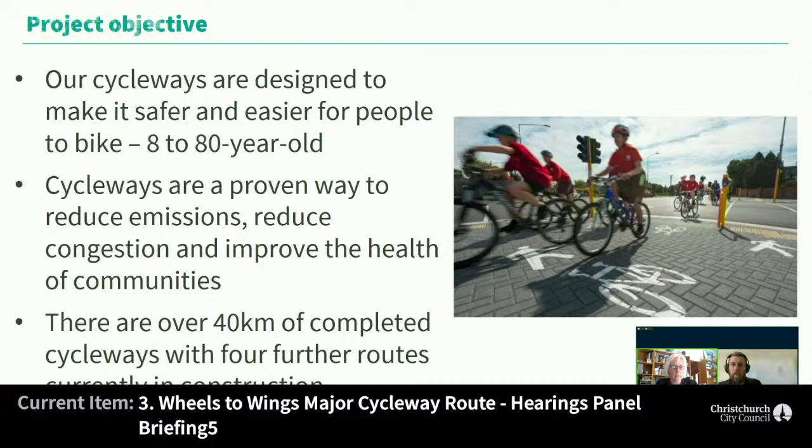Here we go. So these are our objectives. We're looking to deliver against the objectives of the Christchurch Strategic Transport Plan, which is really about us trying to provide a realistic mode choice for people. But we want to be specific to the needs of the people of Christchurch.

We want to be safe and realistic and achievable. It's really about attracting those people that would like to cycle, but whatever that barrier is, 9 times out of 10, that is about it doesn't feel safe enough. So it's about providing a facility that feels safer to those people that want to try 1 or 2 of their trips each week by cycle, and really try and make a difference in mode shift. That's what we're trying to achieve here, and giving people options.

So my last slide before I hand over to the team is the next one. So that's the network that we've got here in Christchurch. And this is actually a little bit unique here in New Zealand, in that we are the only city that is putting together a cohesive and interconnected network. Now you can see from this, the dark pieces are built. The medium strength pieces are underway. And the lighter ones are the ones that are planned for the future.

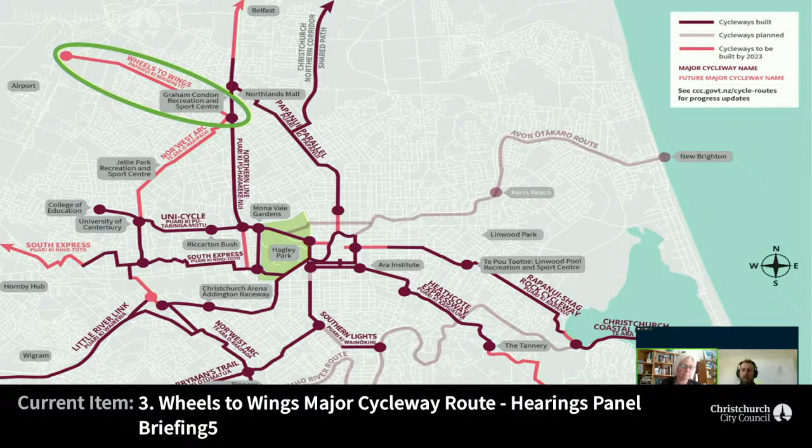Great. Thank you. Okay, so the objective of today is to brief the hearings panel on the Wheels to Wings cycleway, and we're going to divide the project up into 3 main sections because it's a relatively long route at 4.6k. So we're going to look at the west end from Johns Road to Nunweek Boulevard, and then the east end from Greers Road to the Northern Line, and then finally the central section, which is Nunweek Boulevard through to Greers Road.

I'll present the project background and design considerations for a cycleway, and specifically for the Wheels to Wings route, and then Anne will go and provide an overview of the community and stakeholder feedback.

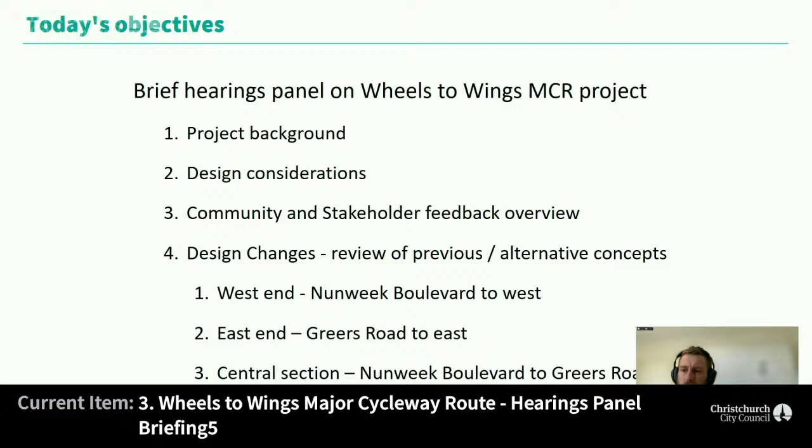So back in 2017, we undertook a route selection where we looked at a wider network and identified where a cycleway could go, linking the Johns Road underpass through to the Harewood Road at the railway line. And that was presented and discussed with the community boards through those areas, the Papanui Innes and Fendalton Waimairi Harewood community boards. In 2018, the Harewood Road was endorsed as the preferred route for a major cycleway to be on, and that was endorsed by the Infrastructure, Transport and Environment Committee.

In 2019, the Gardners-Breens Harewood intersection upgrade was approved by council, and that is for traffic signals to be installed at that intersection. And as part of that, funding was brought forward, and for that to be included with the construction of the wheels to wings.

In 2020, we started the scheme design reporting. So that involved joint community board briefings in November. The Urban Development and Transport Committee confirmed the route along Matson's Ave as the preferred route for Nor'West Arc. During the same time, the Greer's Harewood intersection was identified for minor safety improvements, and the Northern Line Harewood Road crossing was confirmed for traffic signals, with construction of those expected in 2023.

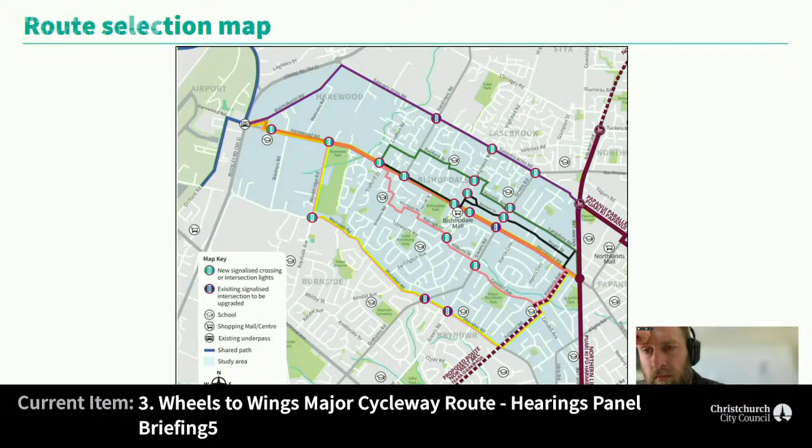You can see the width of the corridor, shown in light blue, is quite extensive. It extends to Sawyers Arms Road in the north, through to Wairakei Road in the south. All the different coloured lines are the different routes that were assessed against certain criteria - criteria for cycleway users, criteria on impacts to the community, and criteria on costs and program.

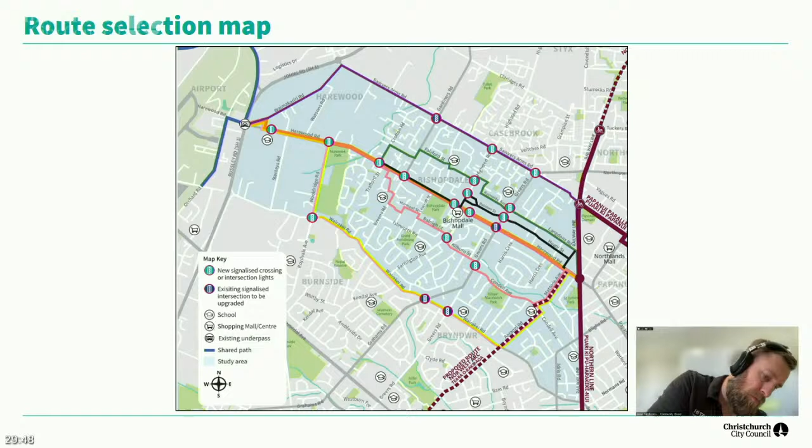The outcome of this was the identification of Harewood Road as the preferred route, which was endorsed by the ITE in 2018.

As part of that evaluation of the route, we identified what's a straw man of a facility type. The facility type wasn't locked in, it was just an understanding of what kind of facility would be suitable for the volume of the road and the areas we're trying to connect into.

Back in 2017, the facility types that we thought would be appropriate at that time are shown there: a shared path on the south side down by Harewood School, two-way past Nunweek Park, one-ways through the central section, and then either one-ways or a two-way on the north side from Greer's Road through to the Northern Line Railway.

So what do we consider when evaluating a major cycle route and the kind of facility that might be included on a road.

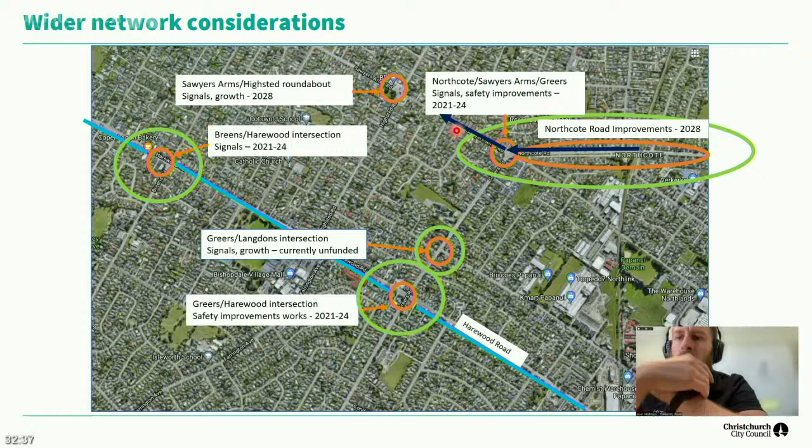The first one highlighted here is the Northcote Sawyers Arms traffic signals and the Northcote Road improvements, which is a capacity improvement to get more traffic through. This project promotes the east-west link along Sawyers Arms Road from QEII Drive. That's the route coming from QEII Drive along Northcote Road. Improvements at this Northcote Sawyers intersection improve capacity and attract more traffic to Sawyers Arms Road. Currently it's quite a difficult turn to undertake, the right turn from Northcote Road to Sawyers Arms Road. So that improvement attracts a lot of traffic away from Harewood Road and onto Sawyers Arms Road.

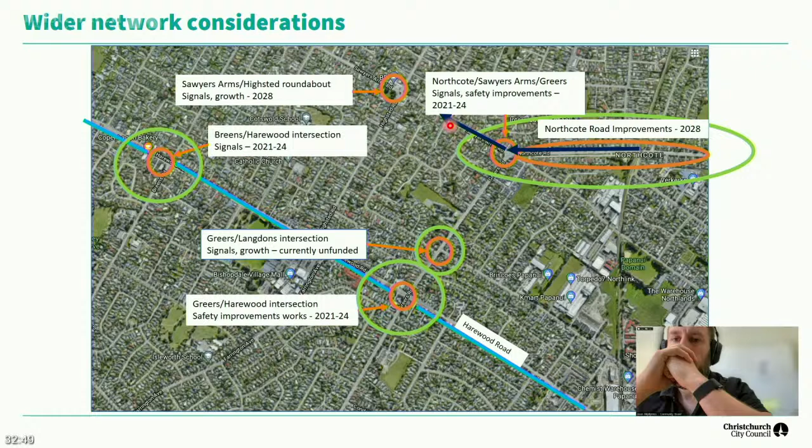Other improvements include the Greer's Road intersection, where there's currently a crash problem, and there's a safety project that's going to provide right turn arrows off Harewood Road and Greer's Road.

There's the Breens Harewood intersection that has been approved by council for construction, with new traffic signals there. The feedback from the public was that it's quite difficult to exit Breens or Gardners Road.

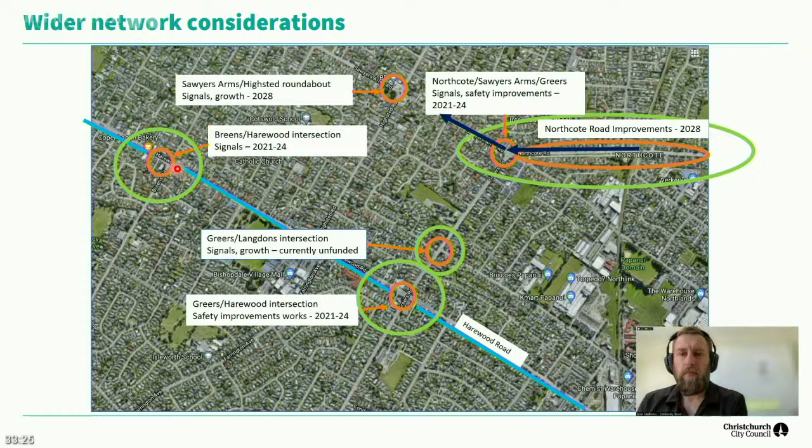The Sawyers Arms Highsted Roundabout has capacity improvements proposed in 2028. And then the Greer's Langdon's intersection - that's had increasing pressure on it. It's currently unfunded, but it is being investigated by staff.

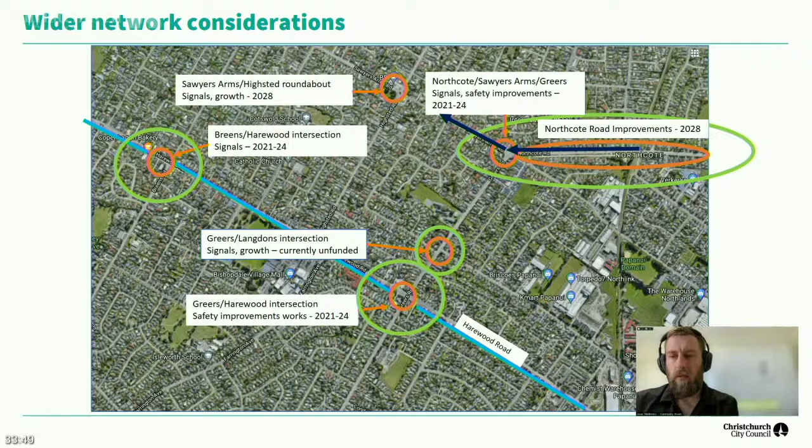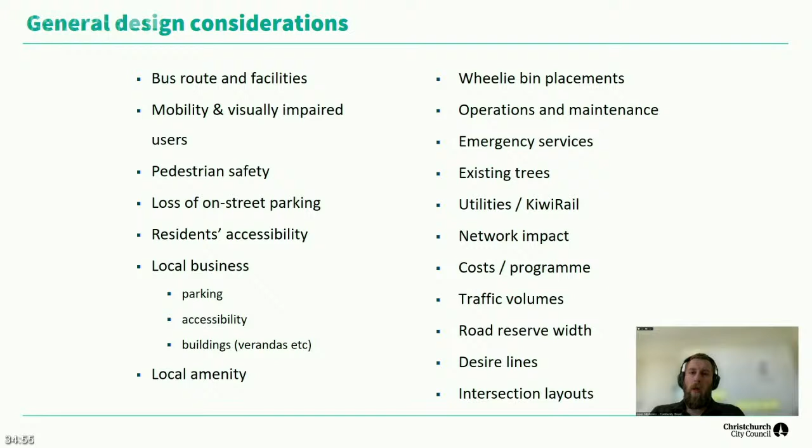Specific considerations for the Wheels to Wings and Harewood Road route include the 4-lane section. What are the effects of removing a traffic lane?

Does this support other improvements in the area, and is it supported by other improvements such as the Northcote Road signalisation?

The link to the Northern Line MCR, which is existing, and the proposed Nor'West Arc on Matsons Ave - how do these interact with each other, and how will they connect?

The Bishopdale Roundabout is a large intersection with a lot of mature trees in the middle of it. What's going to be most efficient for traffic, but also the pedestrians and riders coming through?

Quite unique to Harewood Road is the number of rest homes and retirement villages, particularly up the eastern end with Golden Age and Wesley Care. We have the parks, Nunweek Park, Bishopdale Park, and sporting events that occur there. There's a really high on-street parking demand associated with those, along with the everyday activity of parents coming along with children.

Vehicle speeds along Harewood Road - the surveys are showing that the vehicle speeds are about 5k an hour higher than for a road of this function. If we compare that to the likes of Memorial Ave, the average speed there is 50k, while Harewood Road's up at 55. So there's a speed issue along there, and we've had that feedback from the public.

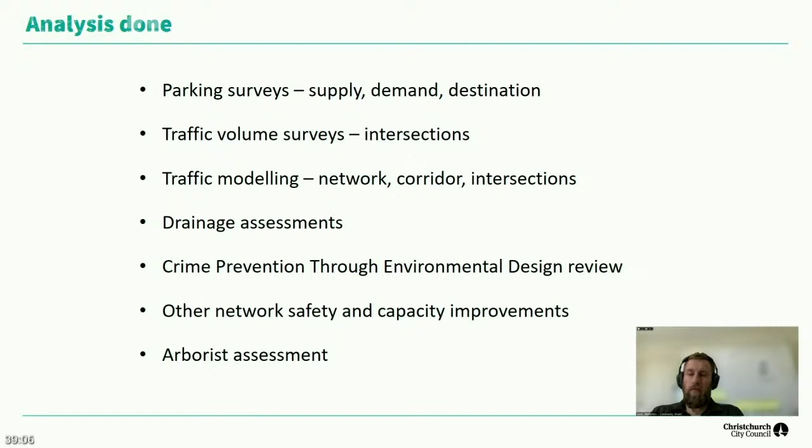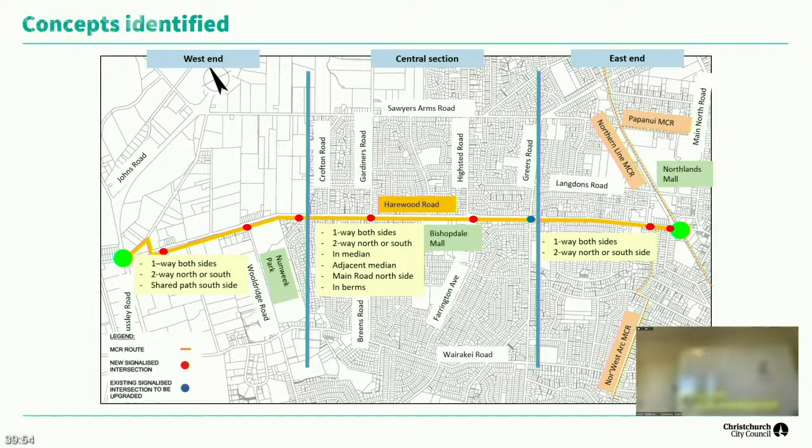These concepts have been evaluated against the design criteria, such as safety for the riders, and that being key for attracting new riders, the interested but concerned group. How direct is the route, how direct is the facility on there, and how comfortable is it to use?

And then we look at the community impact - will parking be removed outside residential properties? Will access to businesses be restricted? And then the costs and the risk associated with delivering that facility.

So review of those options on the previous slide resulted in the recommendation of a preferred concept to go out to consultation, and that is the design that was consulted on, which started in January of this year.

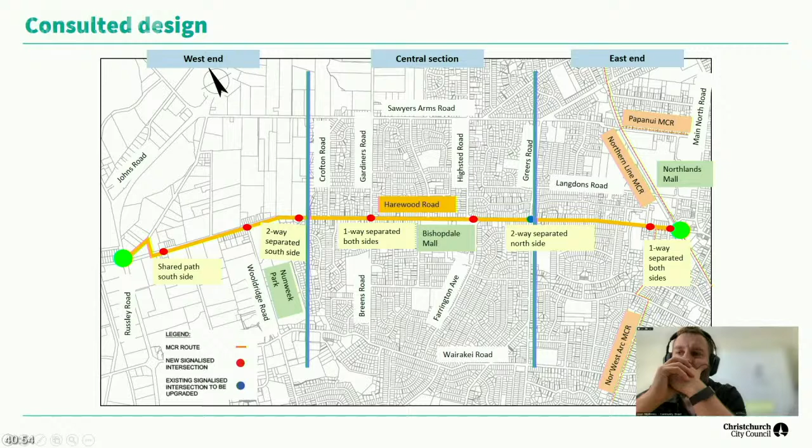It's really a straw man for consultation, and it's based on our technical assessment. We go out to the public and say, we've done a technical assessment, we've visited the site a number of times, at different times of day, and we have an understanding of the route.

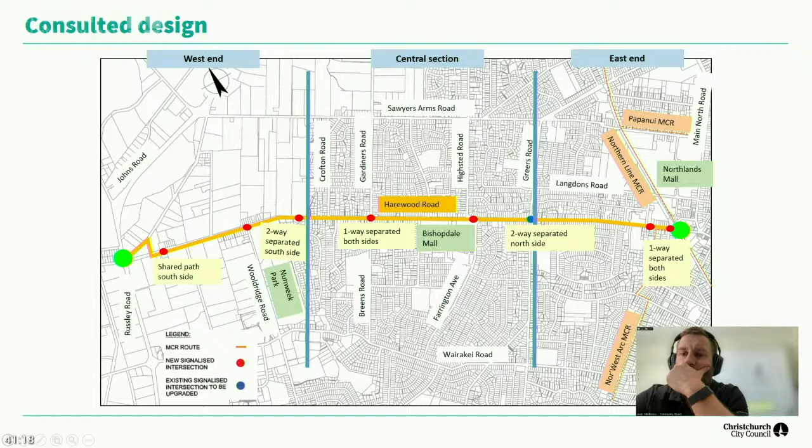But we don't live there. We don't see what happens 24/7. We don't see what happens during special events. So we come out to the public and ask them, tell us how this might impact you. Here's our straw man, here's our best technical assessment - tell us how that impacts you, and we can then evaluate that and make some changes where needed.

So the route that was consulted on, if I quickly run through that: from the west end, you have the underpass of Johns Road. A shared path is provided on the south side of Whitchurch Street, which continues to Waimak Road on the western side, then crosses over to the eastern side of Waimak Road, down to Harewood Road.

It crosses Harewood Road via new pedestrian and cycle signals on a raised platform. This slows down the traffic and creates a safe zone for the kids to cross from Harewood School.

The shared path then continues along the south side of Harewood Road up to Wooldridge Road, where new traffic signals at Harewood Road allow riders to cross and continue via the shared path in front of Nunweek Park up to Kilmuir Lane.

At Kilmuir Lane, the facility changes to a two-way separated facility on the south side of Harewood Road, continuing up to Nunweek Boulevard, where there are mid-block pedestrian and cycle signals, and the facility swaps to a one-way facility on either side of Harewood Road.

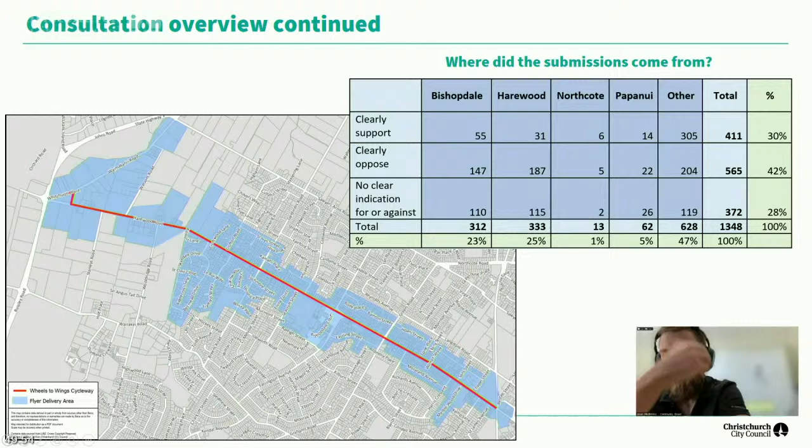So that shows a bit of a breakdown on people's position on the Cycleway, and we've separated them into the 4 major suburbs in that part of the city, as well as those people from outside the area. Submitters with a PO box number, who may not have provided an address, or whose address was outside those 4 suburbs, sit in the other column.

The breakdown of numbers in terms of the spread is similar to other cycleways across the city, possibly with a bit more opposition to the cycleway in this area, but overall it generally aligns with other cycleway projects we've consulted on in the past.

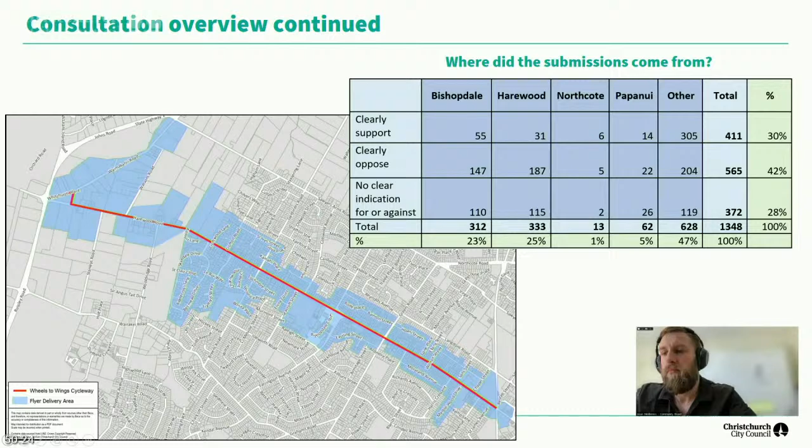In the early stages of consultation, it wasn't myself, it was my colleague prior to me, and one of the team went and met with the students at Hallsville School. They got to meet with all of the students apart from one year group, year 6, who were away on a school camp, but other than that, every other student was involved.

While we're talking on the school topic, I should mention we also received a submission from the Ministry of Education. Looking at the bigger picture, they identified 6 schools in the area who could benefit from the new Cycleway: Harewood School, Cotswold, Breens, Bishopdale, Isleworth and Papanui High. They also said the new signals on the route would increase safety for their students and teachers getting to and from school. They did raise a slight concern that the changes could result in vehicles using other routes which may cause safety concerns for other schools, but they're generally supportive of infrastructure near schools that facilitates active transport and improves safety for their students.

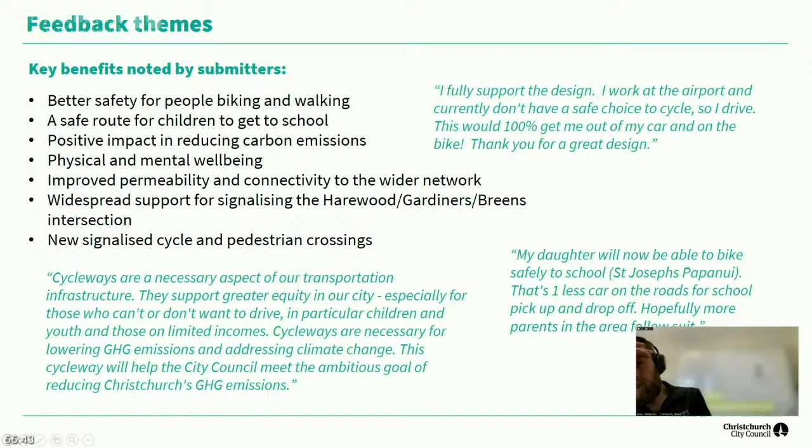It also provides mode choice for travel and the connection to other cycleways around the city. So these were some of the issues that I touched on earlier that were raised by submitters.

As a breakdown from Harewood Road itself, we received 172 submissions from residents and businesses on Harewood Road.

Probably the biggest thing was the loss of parking. In relation to residents, a lot of people were concerned about home services being able to get to their property, the likes of Nurse Maude, Meals on Wheels, lawn mowing contractors. Also concerned that if they had family or friends visiting and couldn't get a park outside their house, they wouldn't come and visit them.

Once we received that feedback, Ollie and I went and met with Age Concern and spoke to them about the concerns raised by these older people living on Harewood Road. Their feedback was that for the services provided, if they can't get a park up the driveway, they're happy to park on the street because it's able-bodied people visiting, and they wouldn't stop visiting people if there wasn't parking outside the house. So that was good to hear.

They've also offered support that they can provide a service where they can pick up and drop off people as well. Feedback from the businesses around loss of parking.

Again, like I mentioned earlier, there is a real range of businesses and organisations on Harewood Road. Some of them have off-street parking and some do rely on the parking on-street. The rest homes and retirement villages, a lot of their visitors are often elderly and need to be able to park on site, or on the street if they can't.

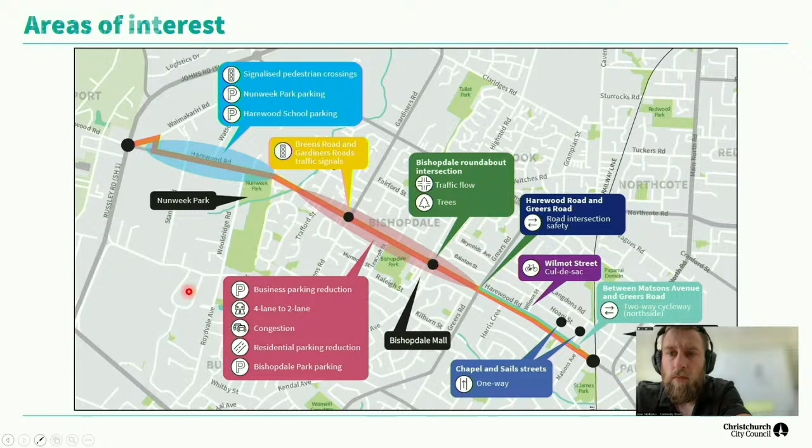Through the central section, parking was a very strong focus, particularly around Copenhagen Bakery and the high demand for on-street parking there, a very popular business. There was also concern about congestion associated with the removal of a traffic lane and new traffic signals, and residential parking reduction, particularly around people having access to properties, visitors, and social isolation.

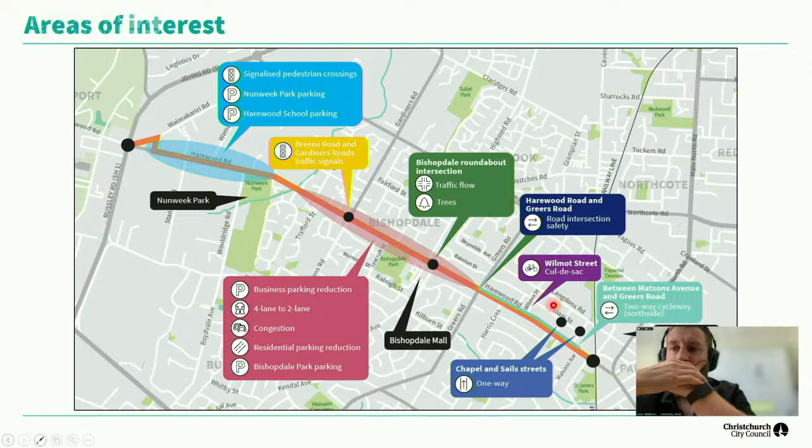Down at the eastern end, there was concern around the two-way section on the north side of the road running past Golden Age, with safety concerns about its operation. Associated with that, the restriction of Chapel Street and Sails Street to entry only or exit only, and the cul-de-sac at Wilmot Street.

So before we go on, let's pause and see if there are any questions around the consultation feedback. This is actually the first time I've chaired a Cycleway hearings panel, so thank you very much for the level of detail you've provided. It's extremely helpful.

I know the area well. I grew up in Papanui and used to go pick raspberries at Harrow's on Sawyers Arms Road, so I've cycled this route, or parts of it, way before it got busy with traffic. But I wanted to ask a preliminary question that's been puzzling me for some time: the underpass to the airport at Johns Road seemed to be decided quite separately from the conversation we're having now.

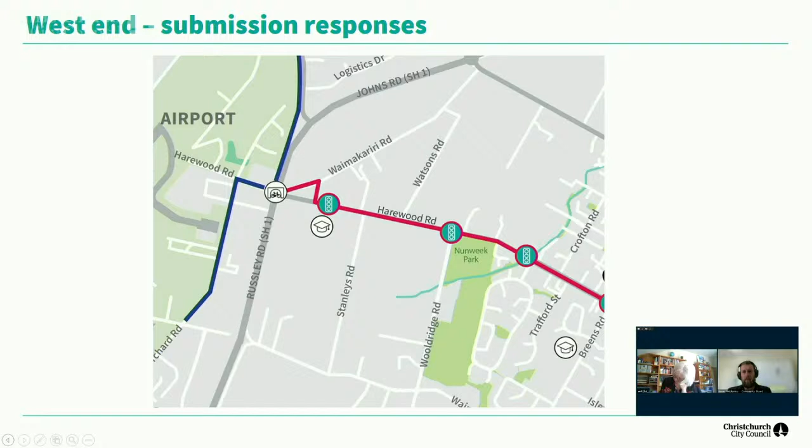Effectively, we'd like to widen that path, but it is narrow, and the grass next to it is a stormwater swale, so it's very difficult to widen the path into that area. How we've been able to respond to the community is to provide some bollards there and improve the connection onto Whitchurch Place, which works very well as a cycle connection outside of the school peak periods. At the start and end of the school day it's very busy with parents and caregivers coming and going, but outside of that it's a really low parking demand.

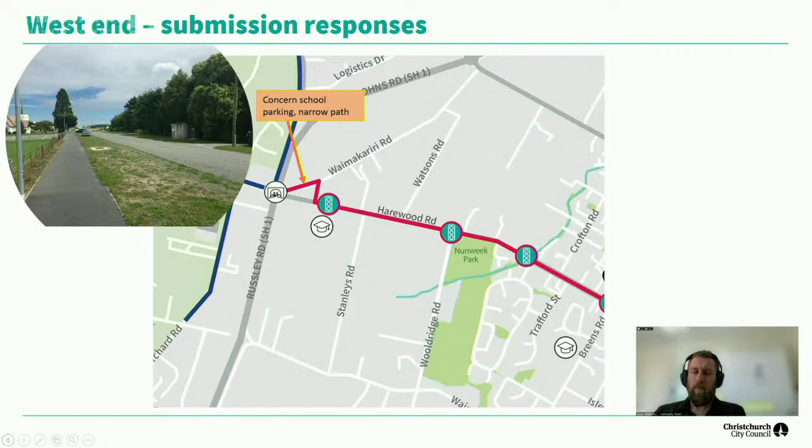At Nunweek Boulevard, there's the proposed signals and platform, and there was concern around that stopping traffic movements and potential noise associated with that.

With the signals at Wooldridge Road, some residents have phoned and said you're going to lose some of the parking there, which is a requirement for the signals, but also the access to their property is going to change now. Particularly during peak periods it'll be more difficult to enter and exit. It isn't any different to any other residential property adjacent to signals, but it will be a change for this location.

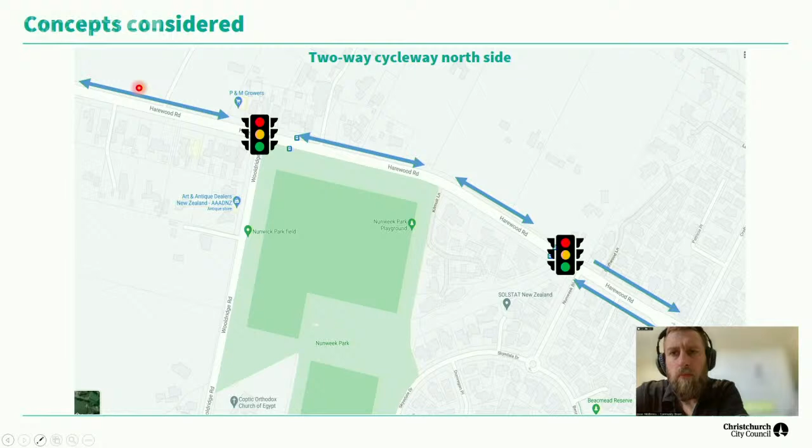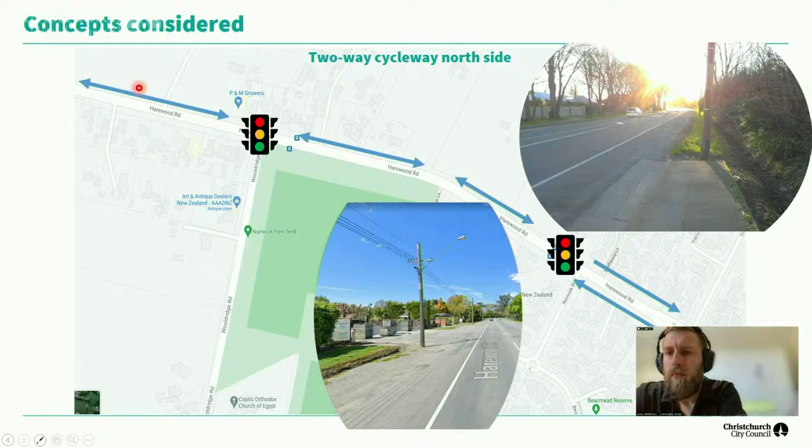And that continues along Harewood Road - this is outside the veggie shop, the photo looking back towards Papanui. You can see the power poles and swales, continuing all the way along Harewood Road up to Harewood School.

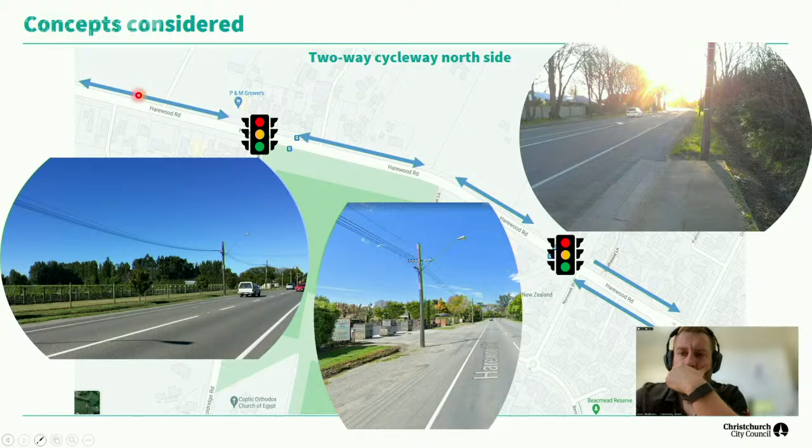Now, if a two-way was provided up to Harewood School, there'd be additional parking loss through that section, which at the moment has been minimised. So primarily due to the additional parking loss of a two-way option on the north side, this option isn't preferred, but it's also an additional cost to construct.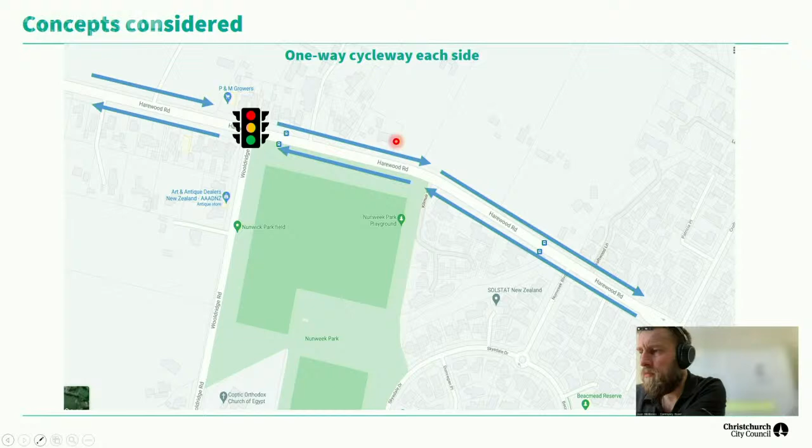Another option considered to mitigate the parking and signals concern was continuation of the one-ways from the central section, coming from Papanui, continuing the one-way on either side of the road all the way up to Harewood School. This also has a number of car parks that would need to be removed on the north side of Harewood Road, similar to the two-way option, with similar conflicts with the swale and power poles.

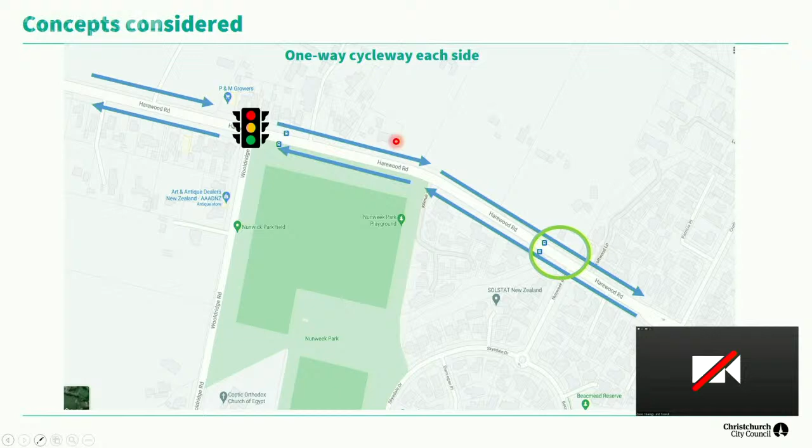If it was to continue up to Harewood School, it would have a similar impact, but it does remove the signals from the Nunweek Boulevard area. But noting that Nunweek Boulevard area has bus stops on either side of the road, so it's reduced connectivity for people using public transport. It retains some parking in the Kilmuir Lane block between Nunweek Boulevard and Kilmuir Lane, and provides some parking outside of the veggie business.

An option to reduce the impact on the Harewood School area would be to cross the two-way over to the proposed one-way shared path on the south side of Harewood Road, through here, so that as the consultant design crosses over at the Wooldridge signals. That does, though, move the delay that was down at the mid-block signals to Wooldridge Road, so it has additional capacity impacts there. This option also wasn't preferred because it has higher parking removal from the park area and additional costs.

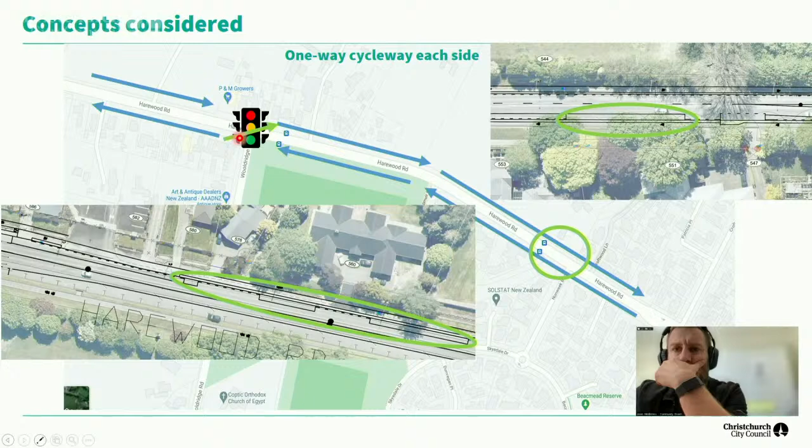So what are the key changes that we've made post-consultation? Up at Whitchurch, we have provided bollards which separate the narrower path from the parking that currently occurs there, which is angle parking during the start and end of the school period.

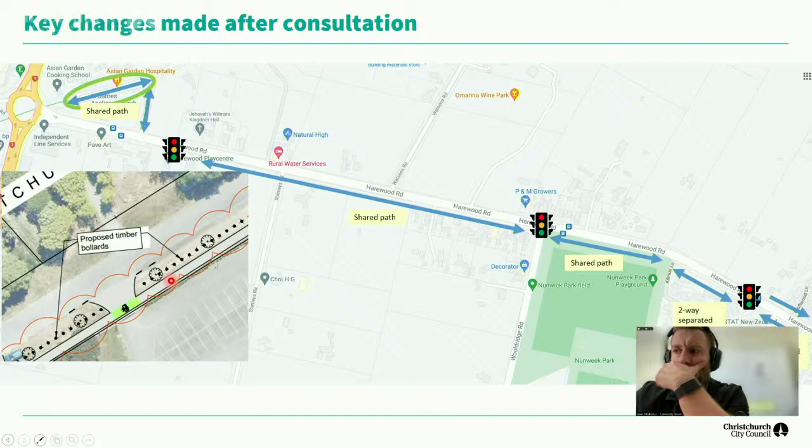This option retains the maximum number of parks, or removes the least number of parks, in this area. At Stanley's Road, we have set back the cycle and pedestrian crossing to allow a vehicle to sit at the Stanley's limit line and riders to pass behind the vehicle. And at Kilmuir Lane, the cycle facility has been moved closer to the property boundary.

And what that allows is people coming from Papanui who are turning left into Kilmuir Lane to position their vehicle out of the flow of traffic. So it's safer for people turning left in, and it allows them to observe users of the path.

Are there any questions around the West End? Almost wish we could have a fly-through and look at the different options in the way. I'll start with you, Jason.

Thank you very much. So just a question on the shared path on the south side past Nunweek Park. Will that lead to any reduction in parking from the amount that's there? And as a supplementary, has there been any investigation into either putting slanted parking or changing the parking orientation there to increase the number of parks you could potentially get, to offset any losses?

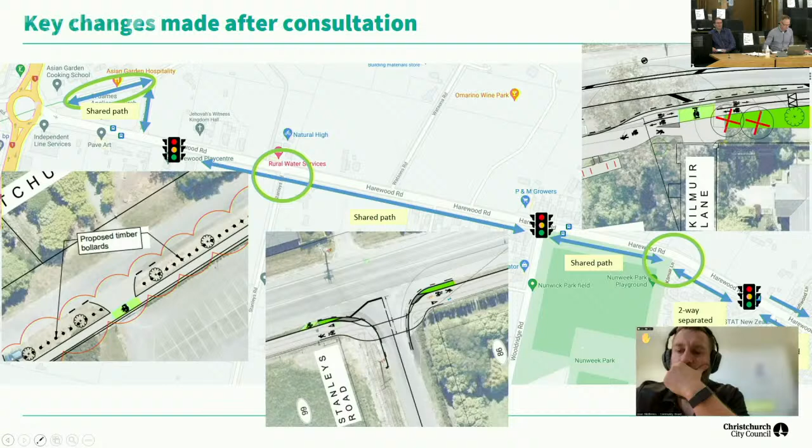Can you go back to the Nunweek Park slide? Sorry, it's easier to look while we talk. All right, so that's the picture, the photo in the top right corner.

Yes, so directly outside the park there are 3 car parks removed. 2 of them are for a bus stop, as the design requirements around bus stops have changed — bus stops now need to be longer, and the tapers leading into and out of them are longer, so that removes 2 parks to make the bus stop compliant. Down by Kilmuir Lane there is a removal of a park to improve sight lines between people exiting Kilmuir and cycleway users. In terms of the angle parking query, it's not something we've considered through that section to increase parking demand.

Is it? Yeah, sorry, I was just asking about the parking. The parking at the weekends is like it's everywhere, isn't it? Is it just a weekend problem, or largely a weekend problem? Yeah, during sporting events, which are predominantly on the weekend, the area is full.

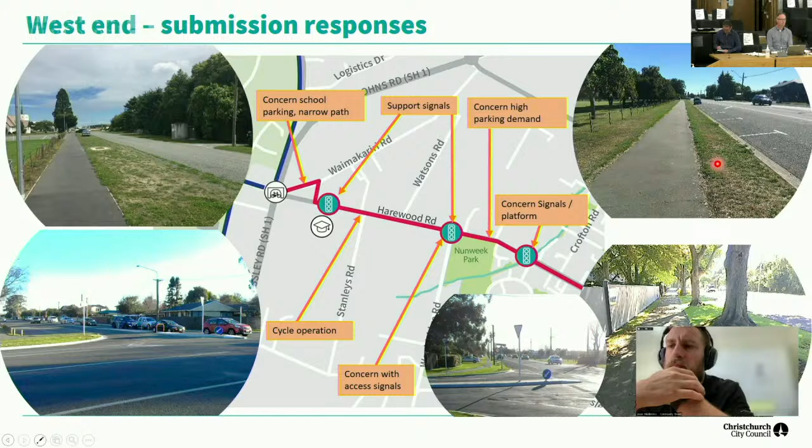There's a considerable amount of grass verge before you get to the park fence at the moment, and also Jason's point around angled or perpendicular parking is that it's now a 50k road. When those parks were put in, I think it was a 70k road, so it's a different environment now. So you can put angle parking in there. Well, staff could look into it potentially. Yeah, that's something we could look at.

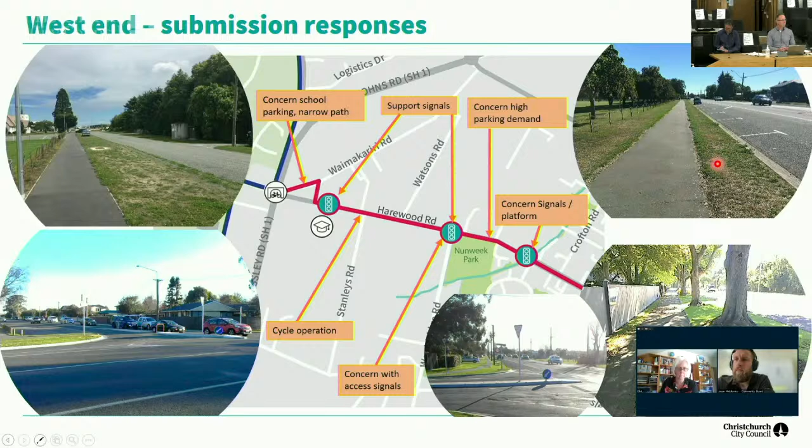Sorry, Emma, I've got a question. Does this new preferred design retain more parking along this stretch than the design that went out for consultation? It's the same. Okay, thanks, Mike.

Just a couple of things. If we look at angle parking, just got to check the safety of them having to back out into a live traffic lane. Yeah, that's right. Look, there's good guidelines around the geometric requirements of changing from a parallel park to an angle park or 45-degree park, and what the clearance to the traffic lane would need to be. So we'd have to go away and look at that.

So did you say the reason why you didn't consider changing the shared path to the north side was because of more loss of car parking? That is correct. Do we know what side has the most demand for car parking?

Through the section from Wooldridge Road down to Harewood School, there's not a very high parking demand through that section. As you get down to Harewood School, it's predominantly on the south side, and then on the north side associated with the start and end of the school day. With the Nunweek Park activities, it fills up firstly on the south side and then spills over to the north, and then it's just where people can find a place to park.

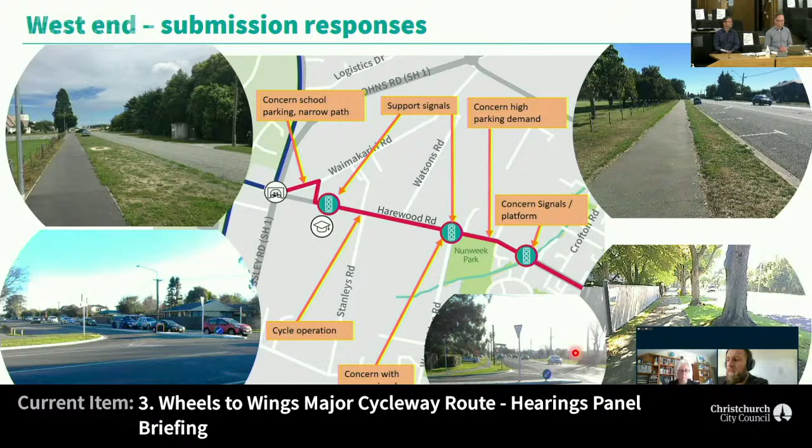There's the crossing before Skydale. I see it's still offset from Skydale. Was there submissions to actually bring that in line to let cars get out of there? Because I've spoken to a few people that said they have a bit of difficulty getting out in the mornings with the increased car traffic, and they were actually wanting it to be moved so they could use it as well. Was there any thought about that?

So that was signalising the intersection of Nunweek Boulevard. Oh, was it Nunweek Boulevard? Yeah, yeah.

Yes, that was considered, and the feature of having the pedestrian and cycle signals close to the intersection is that it minimises the delay to Harewood Road through traffic. But it also creates a gap in the traffic stream by creating platoons so people can turn right out. So that's one of the outcomes of all the additional signals along Harewood Road - while it slows down people driving along Harewood Road, it provides opportunity for people to turn out of the side roads. Okay, thank you.

Thank you. All right, moving on - oh, one more.

Just Aaron, one small one. The irony wasn't lost - with the removal of car parks at Nunweek Park or around there, and it's not a huge number, did we offset that with any submissions from people, because a lot use it, saying that great, now I'll actually bike to my sports events or to the Kids Touch or whatever? Do we actually get any that use that as an example of something that they would do now because it was suddenly safe? Because I mentioned other locations, I'm just wondering if that one came up.

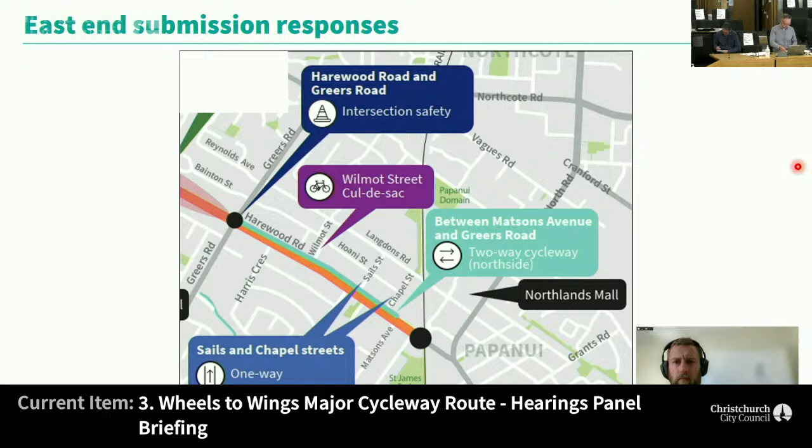So, key responses and submissions received. The Harewood Road, Greer's intersection - a lot of support around addressing the safety concern that's been observed there. So a number of people turning right from Greer's Road, heading along to Harewood Road. There's a crash history there, and the safety improvement that's going to provide right turn arrows for all of those movements. That also allows for protection of the pedestrians crossing via the red lights. So a lot of support for the Greer's intersection.

Support for the signals down by Matson's Ave, Chapel Street area. Because Harewood Road's quite busy down there, and you have the rest homes - Wesley Care, Golden Age - the road is really a barrier. As Anne mentioned, there's a lot of people from Wesley Care that head across to the likes of Mitre 10 Mega and get a coffee. That's like a social hub there where people are meeting up. But there's also couples that are split between the two rest homes - they may have started off together at Wesley Care and then one of them's moved over to the higher dependency at Golden Age. It's allowing those people to easily cross the road. So there's a lot of support for the signals to go in to remove that barrier. The signals in that location also connect up the bus stops that are well utilised by the elderly.

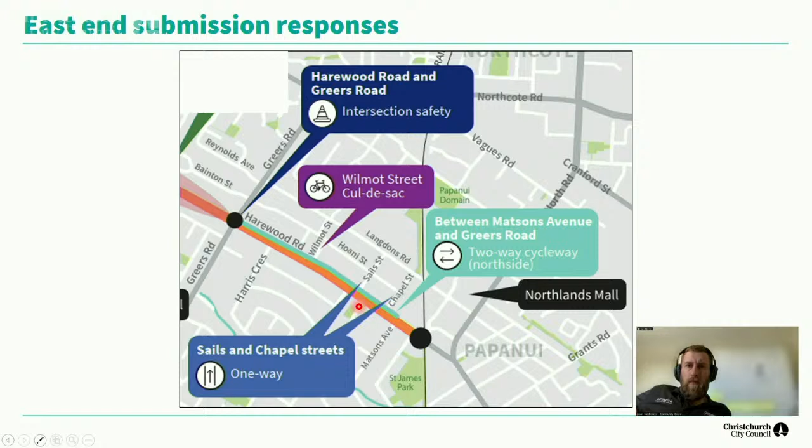With the parking demand in this area, it's quite high along Harewood Road, east of Chapel Street and up towards Sails Street. A majority of that parking demand is long-term or all-day parking, and some of it's related to Northlands Mall and other business activities in the area with the rest homes.

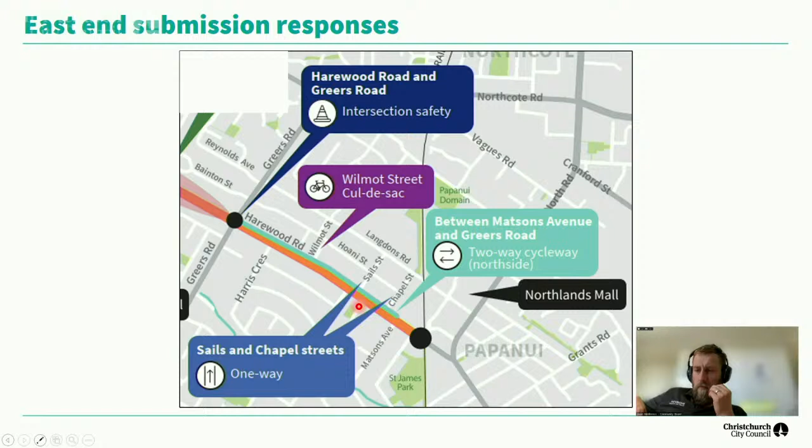What we've tried to do is take the parking that is now available and provide some parking restrictions to encourage higher turnover. But the parking occurring there at the moment is more commuter parking, and that spills onto Hoani Street and Chapel Street. We noted a lot of students from Papanui High School parking in this area. So while the parking's been removed, it is displaced parking, and there is parking available in the side streets. People need to walk a bit further, but when you're parking all day, that's not such a concern as if it's a dairy reliant on high turnover parking.

So what are the key changes that we have made post-consultation?

So the key concerns we had were around the Wilmot Street area. Team Dental and Palmer's Funeral, on the corner of Wilmot Street and Harewood Road, had their access restricted to their off-road car parks by the design. So in consultation with them, moving the cul-de-sac head up to Hoani Street opens up their car parks, but it also opens up Wilmot Street for overflow parking.

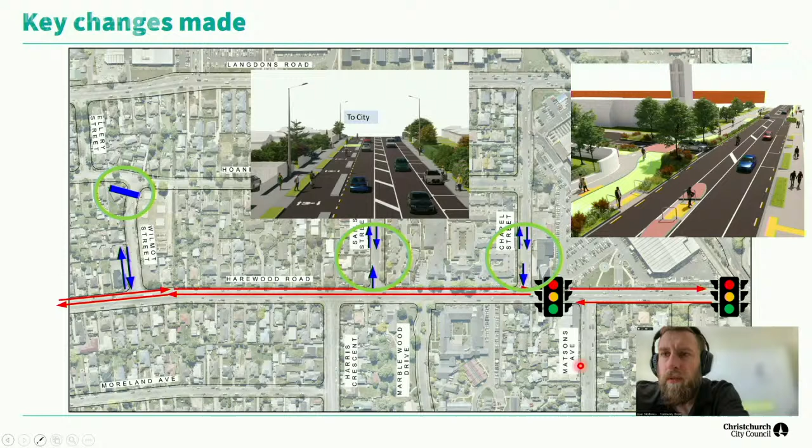At Sails Street and Chapel Street, the one-ways at the intersections have been reversed, based on feedback from the chapel on the corner and from Mitre 10. Mitre 10 were concerned about people rat running through their car park and using it as an alternative to Chapel Street. It was observed that vehicles and people were rat running from Matson's Ave. At the moment it's quite difficult to turn right out of Matson's Ave, so people are turning left out of Matson's, right into Chapel, doing a U-turn in the Chapel Street car park, then turning left and heading down to Papanui Road. By working with these two businesses, we were able to identify some of the intricacies of how the area's operating and swap around those intersections.

A consequence of changing these roads is that additional parking needs to be banned at the Langdon's Road, Chapel Street intersection. That's to improve visibility for people exiting Chapel Street, but also to allow for the heavy vehicle movements into the Mitre 10 area.

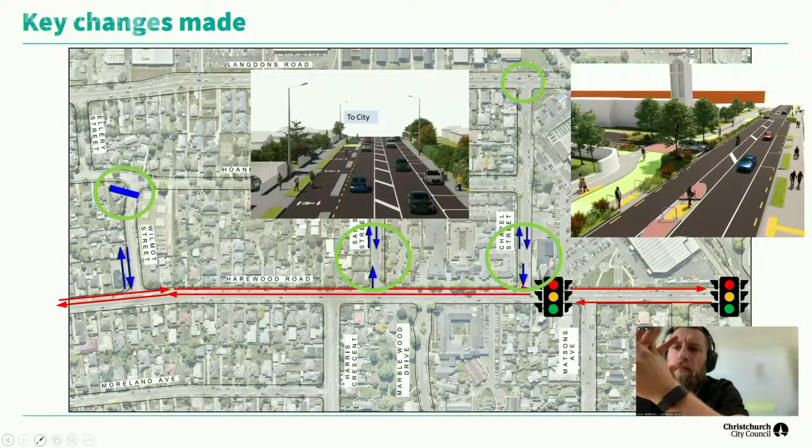This option and the changes we've made don't address the issues raised by Golden Age. We're going back to Golden Age confirming we'll design the line marking and signage in accordance with the latest design standards, and we're also going to look at providing active flashing lights that activate either when a vehicle's exiting Golden Age or when there's a rider on the cycleway passing Golden Age, to raise awareness. That's something we'll develop in conjunction with them.

Are there any questions?

Aaron: sorry, I'll only ask the one really obvious one. It's not our end of town, so we try not to have too much say on it. But because it's been raised by some of the old people's homes - if an outsider looked at that design, they'd say, why are we putting in traffic lights for cyclists who can bike all the way to the airport or all the way to town, and you'd assume they're quite sharp, fit and healthy, yet we're not putting in signals for elderly people who actually need care, who are probably sight impaired, hearing impaired, faculty impaired, all sorts. How would we explain that to people?

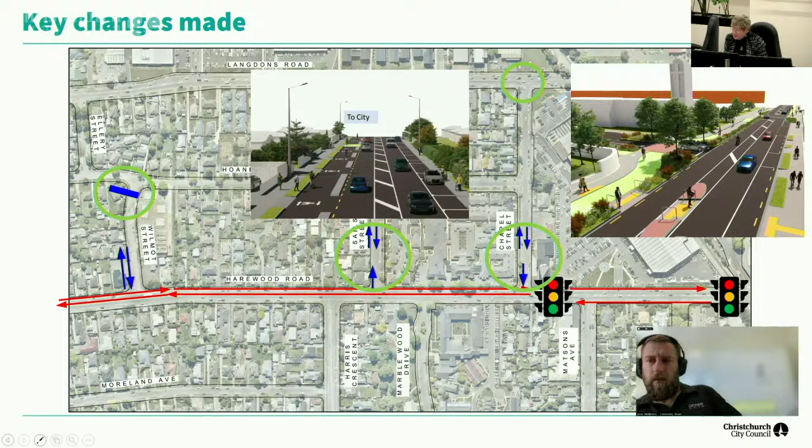Right, we're moving on to the next bit, the centre stage. So the central section - this effectively is the 4-lane section.

There's a lot of support, as Anne had said, around the Gardiners Breens intersection. This was approved by council in 2019. People find it difficult to cross there, so that's one of the design requirements of this project, that intersection will be installed, and we could make some minor changes to it as part of this project.

There were concerns with the 4-lane to 2-lane reduction. A lot of people opposed the lane reduction due to congestion, and they were concerned that removing a lane would make it unsafe for them to enter or exit properties by holding up traffic behind them, particularly with the high speeds observed along that section of road, which are kind of 4 to 5k higher than you'd expect.

The Bishopdale Roundabout - the traffic flow with the partial signalisation of the roundabout, and the removal of trees. Why did so many trees need to be removed? People find them iconic in the area. We also had feedback that the roundabout currently operates fine as it currently does.

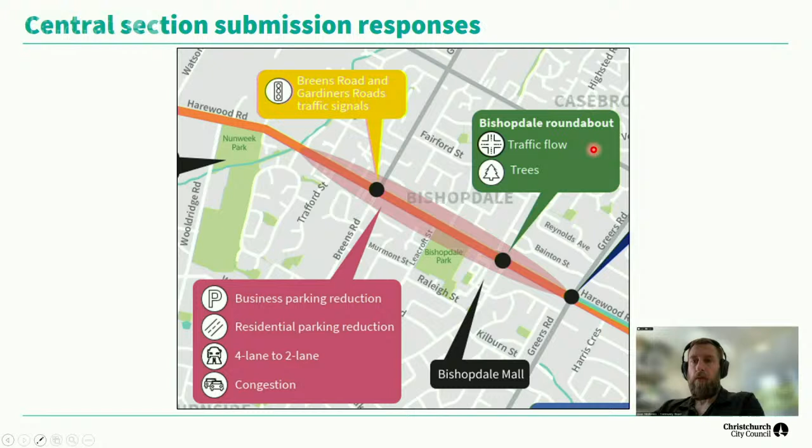And then there's on-street parking removal, particularly around Copenhagen Bakery - came through a lot - Charity Hospital, parking reductions outside people's residences. How would the lawn mowing person go there? Meals on Wheels - would it lead to social isolation of the elderly? And then Bishopdale Park, loss of parking at Bishopdale Park, and how does that handle during sporting events?

So firstly, the concern around the 4-lane to 2-lane reduction. If we consider between intersections, will Harewood Road still work with 1 lane in each direction? The simple answer to that is yes.

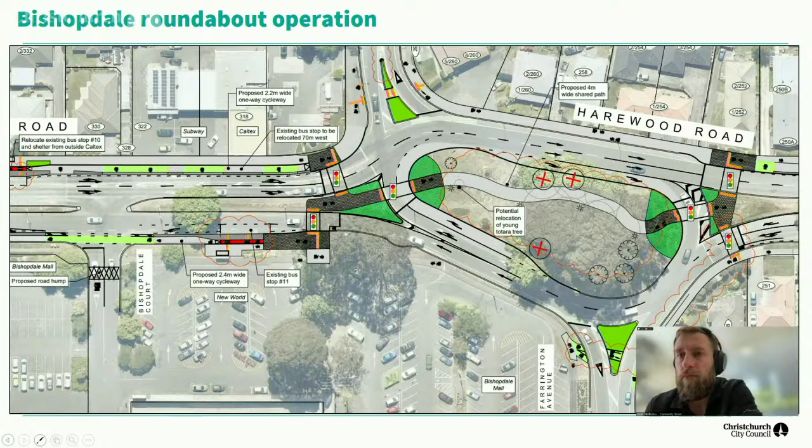To help understand how this intersection operates, we have produced a video using one of our modelling software packages. This is showing the intersection operating during a midday peak period, chosen so you can see the riders coming through and the movement of the vehicles. At the information sessions, we have the same videos for the morning and evening peak periods, and along the full route showing the operation of all the intersections.

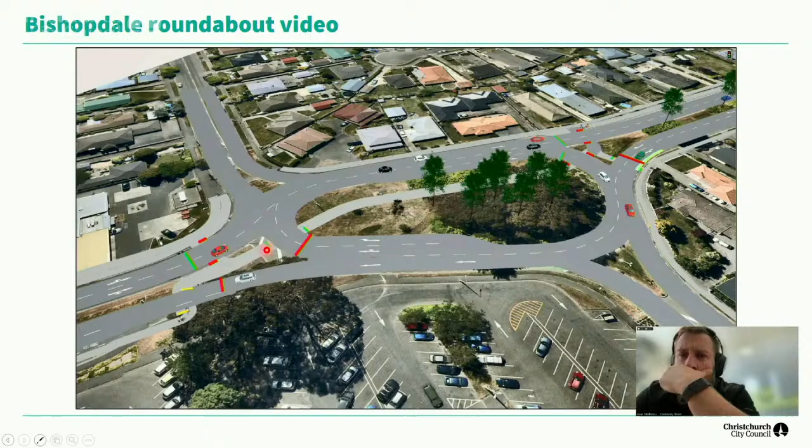Looking at the western end of Harewood Road, this traffic has a green light. When they have a green light, pedestrians and cyclists cross the circulating lane. When it stops the traffic on Harewood Road, it gives the green light to traffic circulating in the circulating lane and allows the peds and cyclists to cross over here. Then the downstream side, the exit of the roundabout here and over here, operates on demand, so when there's a pedestrian or a rider there, that pushes the button.

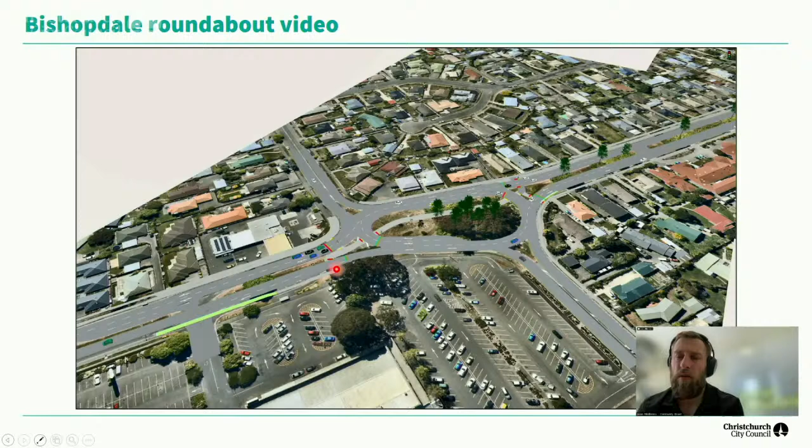Parking impacts through the central section. Overall, we're removing around 50% of the car parks. So we expected there'd be a lot of feedback around the businesses, particularly from Copenhagen, a lot of people concerned around how the business would operate with a reduction in parking. And then the residences.

So the parking removal, primarily it's at intersections to improve sight lines, to improve it for pedestrians and riders. And like I said earlier, the bus stop requirements have changed. Bus stops now need to be longer, and the tapers leading in and out need to be longer. If we didn't do any changes to Harewood Road and the cycleway wasn't installed, we'd still need to remove around 20% of the parks along the road to provide the latest requirements for bus stops, improve intersection sight lines, and improve sight lines at pedestrian crossings. So anything above that 20% is what has been removed for the cycleway.

So the parking surveys that we've undertaken show that there's a reasonably low demand for on-street parking, except at the key locations. So there's a high demand at the Copenhagen, at the dairies, where there's a high turnover, and then down at the eastern end with the mall, Papanui High, and the rest homes.

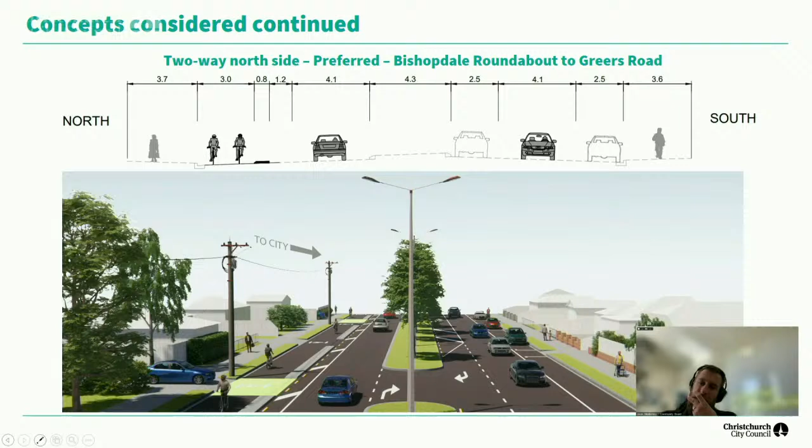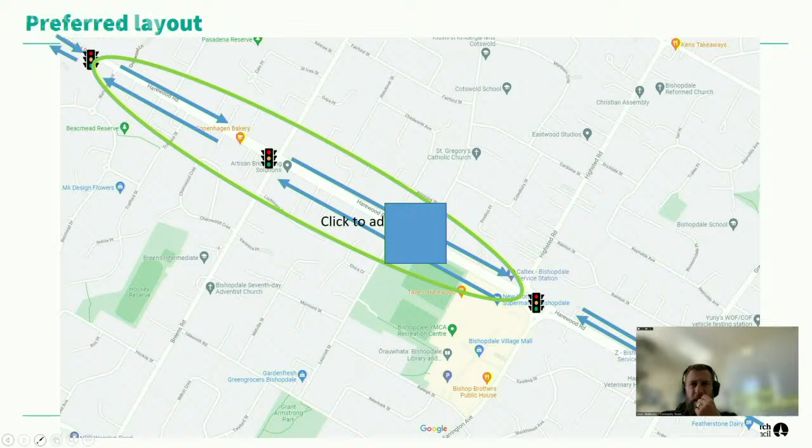So what does that look like in plan view? Just to summarise what I've talked about: one-ways from Nunweek Boulevard through to the roundabout, and then we needed to consider how to link the roundabout to the two-way here, east of Greers Road.

And the best way to achieve that is with the two-way on the north side. Now, what that two-way does is it provides a consistent facility type from the roundabout all the way through to Chapel Street.

So continuing with the concepts considered, we had adjacent the central median, which is one of the options we considered for that roundabout to Greers section. It has a minimal impact on on-street parking, so it provides a good amount of parking. And it has a good rider level of service once you're on the facility.

But looking at the full length of Harewood Road in that central section, it requires the closure of U-turn pockets, and it requires the restriction of the side roads of Trafford, Leacroft and Cotswold to be left in, left out. So while it's a viable option, it's not preferred because of the restrictions to traffic movements.

A two-way cycleway in the central median. Initially, we'd based this on what you see along Linwood Ave. The difference with Linwood Ave is that central median is 30 metres wide, and this is 4.6 metres wide, so it wasn't possible to retain the trees and have a cycleway.

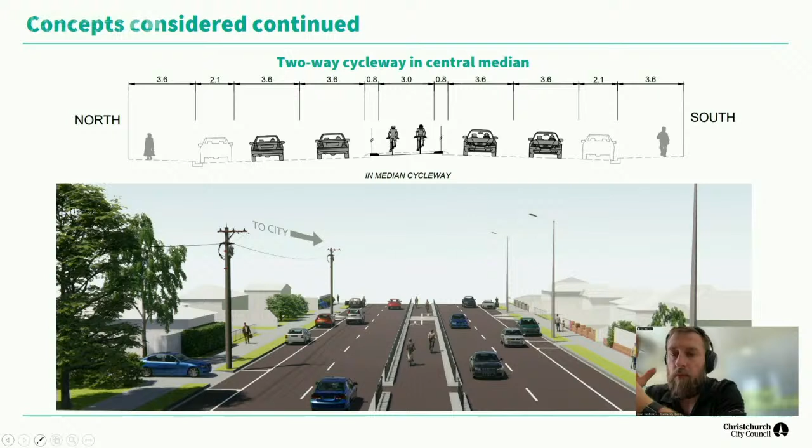A shared path on either side of the road in the berms. A lot of feedback again from the public on this saying, why don't you just remove the berms and seal it? It retains the 4-lane section still, which has the speed issue, which is a safety concern, and this does not meet MCR design requirements.

So it's a significant risk to people riding. And with the elderly, the conflict between riders and elderly people has a poor outcome, so it's unsafe for the elderly.

The road swap, or the main road on the north side of Harewood Road. This has a benefit of providing a low-speed access road next to the Charity Hospital, Copenhagen Bakery, and it would be a 30 km/h road. Adjacent to that would be the two-way cycleway. It would be a pleasant facility to ride on with a reasonably good level of service.

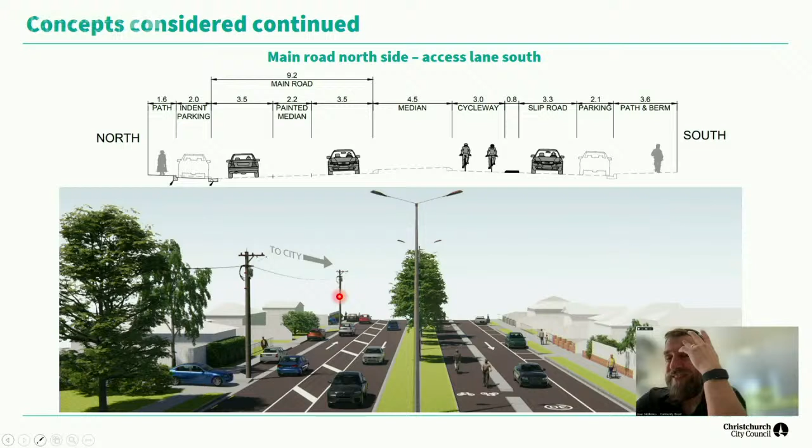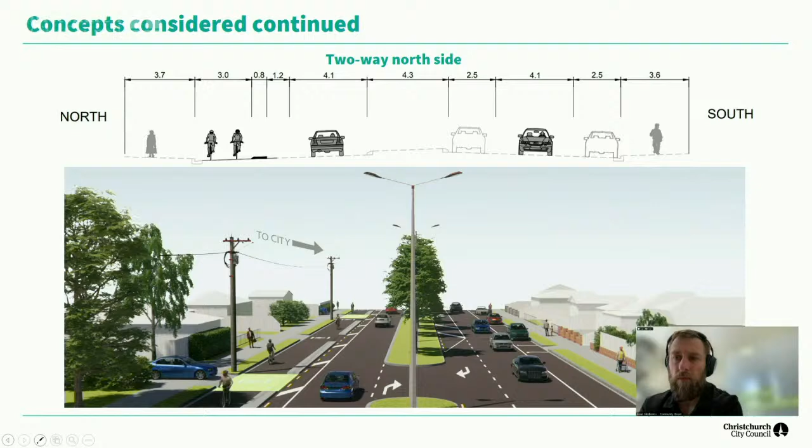So that's not favoured due to the turn restrictions and the inequitable parking distribution.

Just considering the Nunweek Boulevard to Greer's Road section, the full central section, if we compare one way each side versus two way on the north side - the one way each side is the safest for riders and it's the best connected for riders. A two way on the north side is less safe for contraflow riders, and it requires riders on the other side of the road to cross over a traffic lane or ride on a short section of the footpath.

The one-way removes 50% of the parking, and the two-way removes 20%. However, of that parking retained in the two-way, 100% of it is removed on the north side. So anybody on the north side, if they have to park on the street, parks on the south side of the median and needs to cross over a traffic lane and a two-way cycleway.

It also requires the restriction of Crofton and Cotswold to left in, left out. A one-way doesn't have any side road restriction, and it's the most intuitive for all users.

So what are the key changes we have made in the central section? Down by the Trafford Street shops, we've swapped over the bus stop and the P5 parking, and that's working with the shops on the corner here and having that P5 closer to where the business is.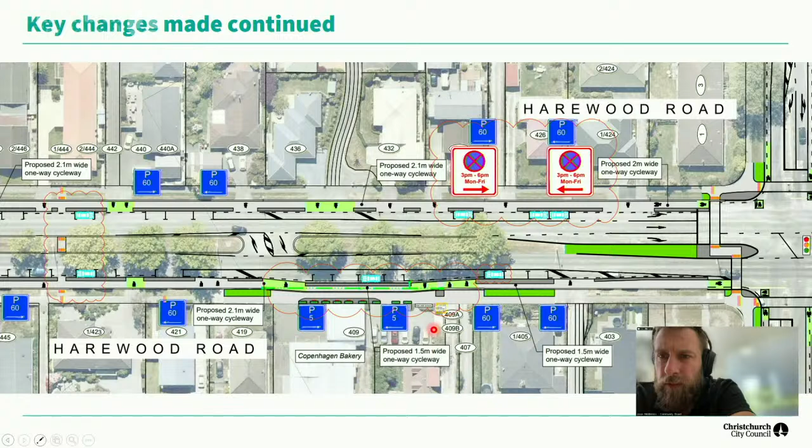Now at the bakery, there's been a number of changes to their access way, the parking outside the bakery, and that's to help mitigate some of the operational concerns that they currently have. That's best seen in this 3D pictorial. So the Copenhagen Bakery is the site on the left of screen.

We've moved the access way. By moving the access way to the east, it provides an additional park outside the bakery, but it also mitigates one of their concerns of the off-street car park. The off-street car park is currently quite difficult to get into, and it's very narrow and congested. So this opens up their off-street parks and makes it easier to get into those.

They also provided feedback that there's queues building from the accessway of people trying to get into the car park onto Harewood Road at the moment, and it blocks one of the through lanes. So by moving the accessway, it allows vehicles to queue on the accessway and over the adjacent accessway - so 2 vehicles to queue out of the through stream on Harewood Road.

We've indented the parking. People going to the bakery find it difficult to open their car door into the live traffic lane. So by narrowing the cycleway, it allows the car parking to be moved over and provide a door swing area for people to get in and out of their vehicles. These 4 car parks would be P5, so short stay, high turnover.

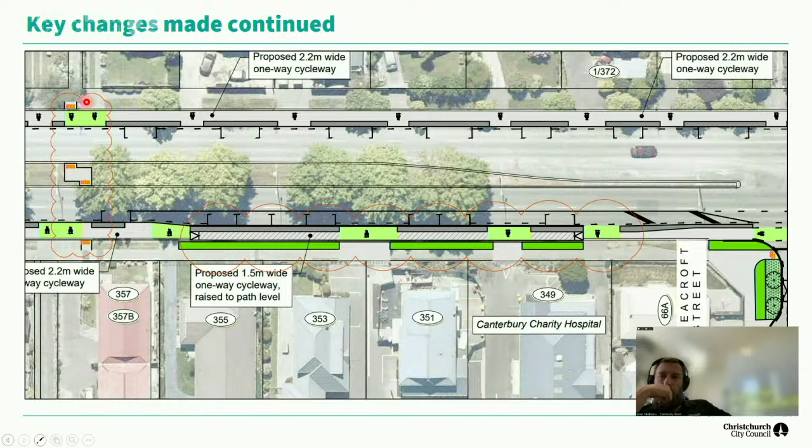With the rendering, we've got Charity Hospital on the left-hand side - indent the parking and raise up the cycleway to remove the trip hazard. Minor changes to the accessways - they were always going to be open, but we've modified them slightly to allow for the delivery of gas.

Down at Bishopdale Park, we've extended a shared path around the corner onto Leacroft Street where the gates into the park are. This links into the children's play area and provides some bike stands.

As a general note, the design of the bus stops has changed. Council and ECAN are always working together to improve bus stops and the provision of them. What we're leading to at the moment is narrowing the cycleways through bus stops to encourage single lane operation and slow the speed of the rider, but also to create a larger area for mobility impaired people to get on and off the bus.

And the review of these design standards is ongoing.

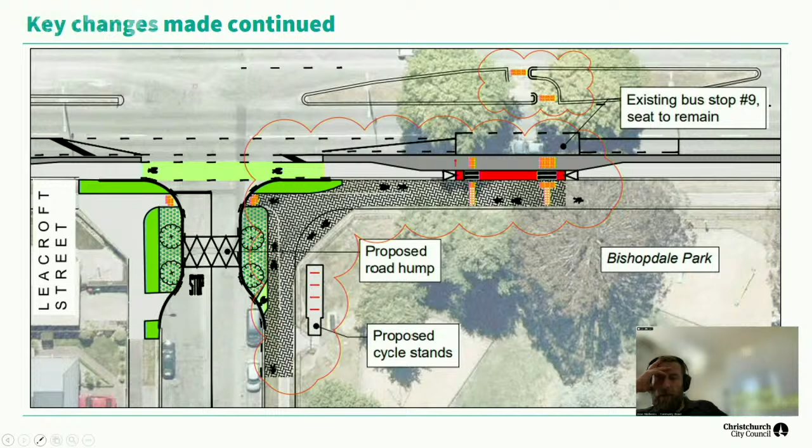At the roundabout, a majority of the trees are retained - potentially no trees will be removed, maybe 3. On Highsted Road, the splitter island has been shortened to cater for the right turn out of Caltex.

There's been a shared path provided on the eastern side of Farrington to provide a crossing over in the splitter island.

So there's quite a long section to get through, and I forgot to call a 20-minute break too, but I thought we were on a bit of a roll there. It's interesting, I mean, obviously I've been aware of a number of the questions and been to see some of the people, but yeah, it's good. Aaron.

Got some questions - some of them go back about 30 slides, but there was the one where you had the heat map for lanes, with Papanui Road, Northcote Road, Harewood Road, and so on. Who made that up?

Whereabouts - let's see if we can go back to it. Yeah, it's quite a way back, that would have been right at the start of this section. Yeah, there, that one, yes. Go forward, one more. Oh, that one there. Yep, yeah, on there you've got Papanui Road.

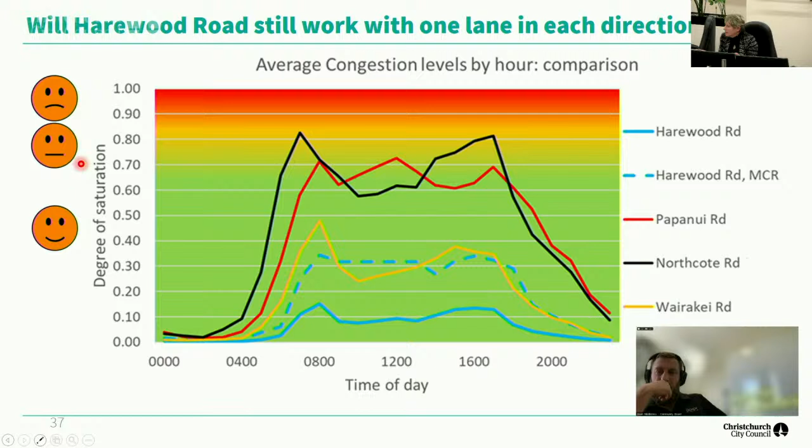So Quay Street in Auckland: the 1.8 kilometre stretch that's reduced from 2 lanes to 1 had a travel time of 5 to 6 minutes, and is now 13. That's a terrible impact on the environment because cars are there twice as long with their engines going. 5 to 6 minutes was the original travel time for 1.8 kilometres, it's now 13. That's not a good outcome.

I think the comment you made earlier about Auckland reducing the capacity of some roads to force people to use different modes of transport could apply to that. What we have done for this route is based on modelling, the same modelling used for any large roading changes or developments within the city, to evaluate the impact of removing a traffic lane.

Right, and then you gave us those numbers: between 20 and 40 seconds increased travel time on Harewood Road, which doesn't sound like much, but across 18,000 vehicles that's 9,000 minutes a day of burning carbon we're adding to the system by doing this. And councillor, getting 3 or 4 or 5 of those people who choose to take a trip each day to choose to take their bike instead will put even less carbon into the system.

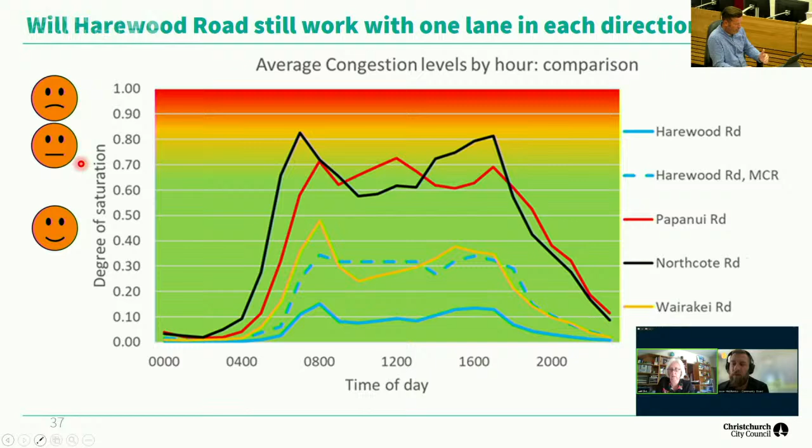But it's also a safety issue, because we know this road is travelling on average 5 kilometres an hour above the speed limit, and the accident rate on those sections, at some intersections, reflects that. If you have an accident going at 60 k's an hour, you are more likely to have a fatal or serious accident, and the person you hit is more likely to be fatally or seriously hurt than if you're doing 50 or even below.

So this is balancing all of the needs, taking into account what we're trying to achieve for climate change. I get that, but it's not just about having traffic moving — if we make bigger, faster roads, we get more traffic. We've talked about that before. That's not true, we throttle roads down.

We probably have to philosophically agree to disagree on that one. If we throttle roads down, they do go slower, but they are safer for people. They move slower, so journeys take somewhat longer, but they move more consistently. Because they're going slower, those roads are easier to cross from a pedestrian perspective, and you get more connectivity across it. So it's a balancing act going through a community.

Another consideration in terms of the emissions from vehicles and the additional travel time is that our vehicle fleet's changing. It's currently 10 to 12 years old, but there's a big incentive for people to get into more environmentally friendly vehicles, electric or hybrid, which have a lower impact when being used. In terms of the overall economic evaluation, the additional delay to vehicles is outweighed by the benefits of having more people in active transport.

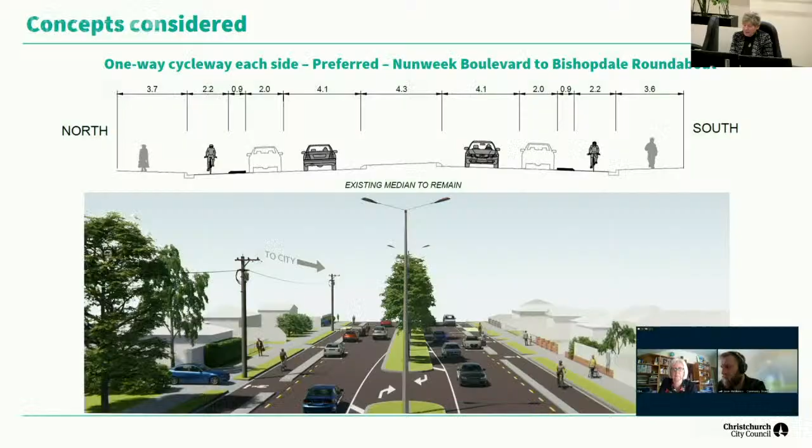Can we go to the charity hospital slide? So I think I have it in my head, the issue around the very large delivery truck for the gas bottles.

And the issue was the use of the extra lane to provide for that swing into. I think they literally had to get one of their people out of the truck to stop the traffic.

So how's that working now? There's a few options for it, but it can still work in a similar fashion: the truck pulls over, comes up the road and actually pulls in to the right, then reverses back into the access way. It may have a chance to pull in nose first as well, but it's effectively going to work reasonably similarly to how it did previously. We're also widening out the driveway going into the hospital, and they may choose to widen their gates to match that, which will give the truck more options for turning in nose first as well.

But it'd be worse to back out though, wouldn't it? There's no route round - it's sort of marginal if it would get round. I think it would have a chance of getting round internally, but it will be tight. It's a very, very large truck. But you're continuing to work with them on that.

This option allows them to do what they have been doing up until now, even with one lane. And the feedback from the charity hospital CEO was that they are very happy with the changes that have been made and the ongoing discussions that we'll have around that.

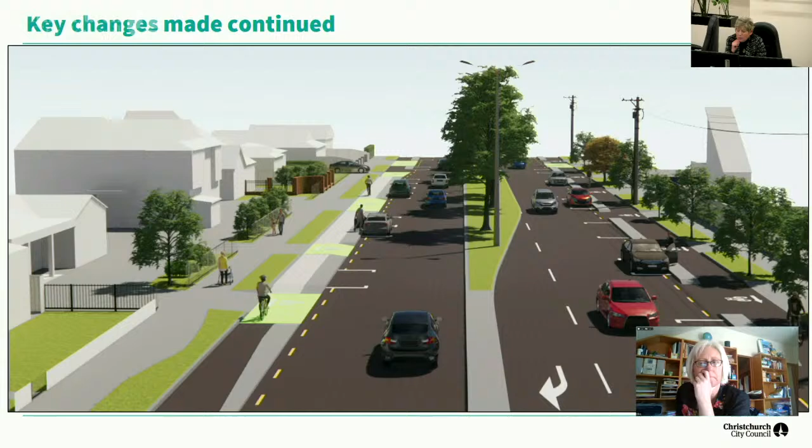Any more on the central section? Okay, right. So we move on to - sorry. Well, it's 4:48, we're almost done. And literally we've got - we've got slides, we've got a brief summary, and we've got the process from here.

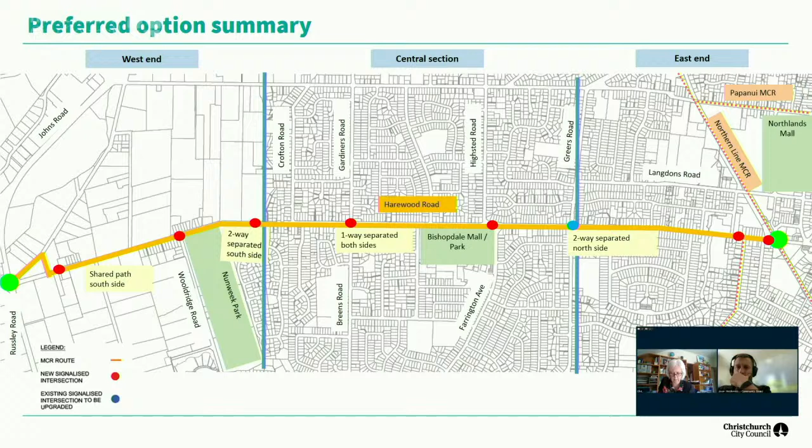Based on the valuable local knowledge we've received through consultation about how people use Harewood Road and their concerns, and considering this alongside our technical assessment, we've developed a preferred option for the route as previously described and as consulted.

At the western end, it's a shared path on the south side of Harewood Road. It widens out the existing path. It's a cost-effective solution that doesn't affect the existing carriageway.

Past between Kilmuir Lane and Nunweek Boulevard, it's a two-way on the south side. It removes the minimum amount of parking through that section.

Through the central section, it's a one-way cycleway on either side. It slows the vehicles down. It's safest for the riders. It's the most intuitive for all users. And it has an equitable distribution of parking, and it has no side road restrictions.

Continuing from the roundabout through to Matson's Ave is a two-way on the north side. It provides parking on the south side of Greer's Road, the south side of Harewood Road east of Greer's, and it has the least impact on the operation of the Greer's Road intersection.

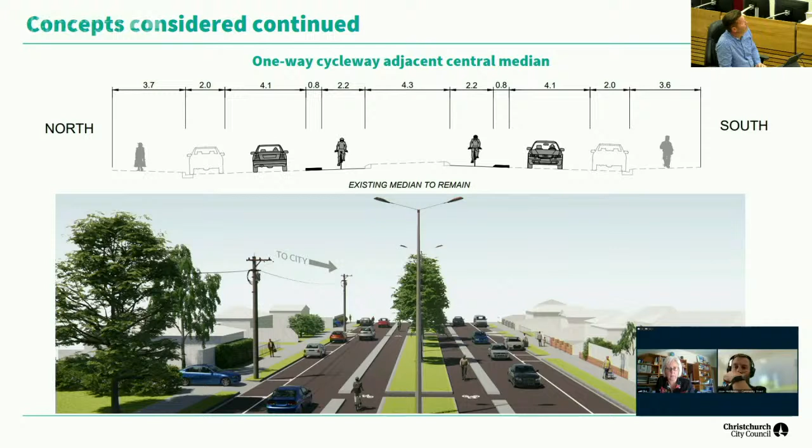I'm reluctant to do this, but let's go back to that picture, because it was the option I wanted to see — a number of the public in the early days suggested it. But the report told me we couldn't do what I wanted, which was to put it like Linwood Ave. So go back to the other one — go one back from there. So that's taking out a lane and putting a cycleway either side.

So not doing that — either side of the tree trunks you've got about 1.8, depending on the tree, because you've got roots in your trees. That's the other option, as you take the trees out. Well, no, there's grass there now. But what we're saying, Councillor, is permeable concrete — you can't fit it in.

Yes, there isn't enough space. It's not wide enough to fit it in.

So how wide does the cycle lane need to be going in one direction? What's our skinniest lane we've got? 1.8 — a 1.8 single direction lane. 1.8, okay, so there's pretty much 1.8.

If you make the concrete side of the curb even 200 mil wider for putting the fence on, because you've got to definitely have that — the team have really looked at it, and they've looked at it seriously, they have taken it seriously. They've done everything they can to see if they can fit it in. They can't fit it in with the trees.

Can you go back one? It's the one I wanted. The only way is to widen the median. I read the paper, this was the only option in the centre, and I thought that were the limitations. We went down with the tape measure and didn't find any spots that weren't 1.8 wide on either side of tree trunks.

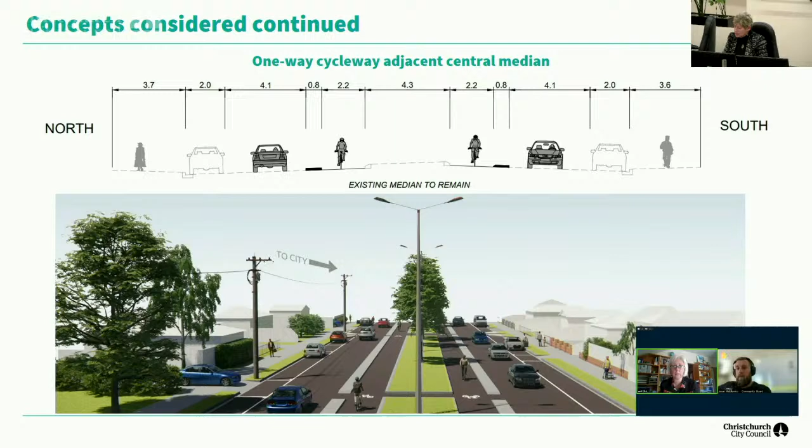But we'll have to hear what the submissions say. I was just bringing it up now because it probably will come up - I just wish we had raised it when we got to the slides on the central bit. So, Jason.

Thank you. So just a quick question from me - sorry, I've just got a 3-year-old that's just busted in. On the process towards the end of it, when we've got, say, the recommended designs, would we be able to go back to show the timing?

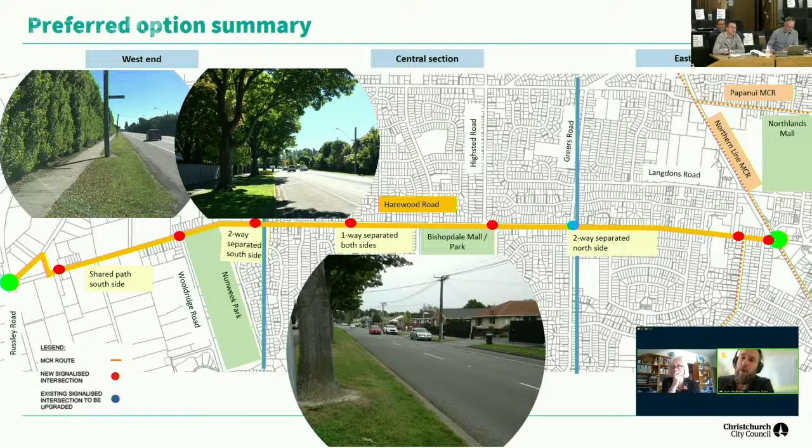Would we be able to show, say - because the way I see it is that a lot of residents might not be able to see the downsides of that 2-way on the north side, even though it has more parks reduced from that side, even though the overall reduction in parks is the lowest. Compared to the preferred option, that would provide quite a lot of justification, because if they can't see it, they're like, 'oh, what about that north side?' So I was just wondering how that might look at that point.

So we're going to go through all of this information with the public at the public open days as well. And all of this information will be presented in the hearings report, as in options and positives and negatives as to why. But staff do need to give the hearings panel a preferred option.

And then you make that call after we've heard the submissions. We may choose to comment on options that we're not recommending as well, and that might also be in the report back. So when it comes to council, it'll be plain what we considered and why we chose the option we chose, and why we perhaps didn't choose some of the others.